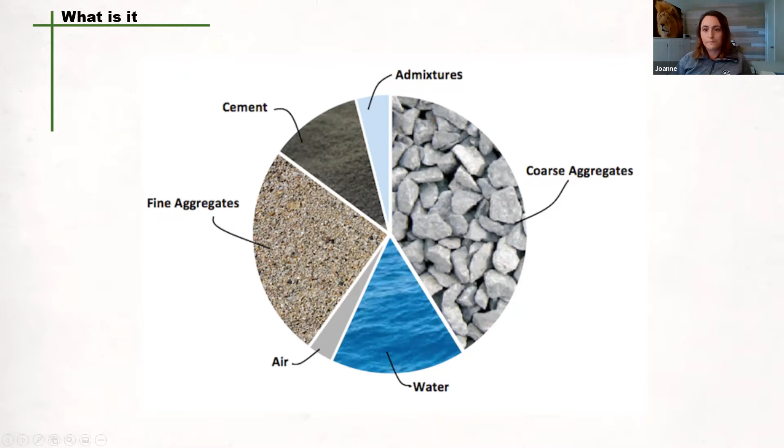I want to talk a little bit more about the cement that is part of concrete. There are quite a few components to it, but I'm just going to deal mostly with lime, which can take up to 62 to 67%, depending on what you get, as well as silica, which is 17 to 25% of the components for cement powder.

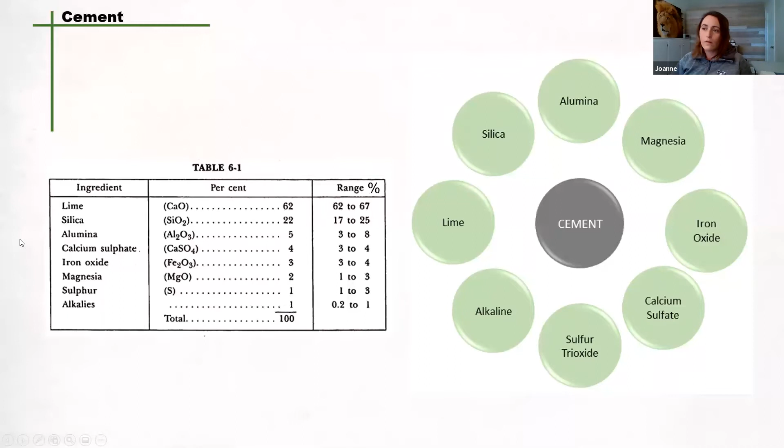When it comes to lime, there are quite a few hazards associated with this, and you do want to consult with your SDS sheet as well when you're looking at the different components of your concrete.

So worker safety for lime — particularly quicklime — is important since it's an alkaline material and reactive in the presence of moisture. Workers handling lime must be trained and wear proper protective equipment. There are quite a few eye hazards that can cause severe eye irritation or burning, and this could include permanent eye damage. Eye protection, including chemical goggles, safety glasses, or face shields, should be worn if there's a risk of lime exposure. Contact lenses are not suggested to be worn in its presence.

Skin hazards are another concern. Lime can cause irritation or burns to unprotected skin, especially in the presence of moisture. Prolonged contact with unprotected skin should be avoided. Protective gloves and clothing should cover arms and legs as well. Remember, lime does react with moisture and generates heat, capable of causing thermal burns.

There are also inhalation hazards as well. Lime dust, when dry, is irritating if inhaled. In most cases, dust masks should provide adequate protection. In high exposure situations, you may want to look at increasing your respiratory protection. Again, consult your SDS sheet.

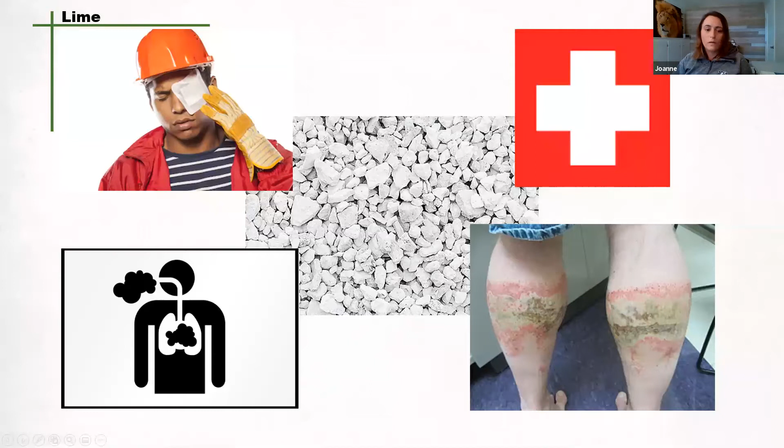So the next one here is silica. Silica dust can cause silicosis, a serious and irreversible lung disease. It could also cause lung cancer. Cutting, breaking, crushing, drilling, grinding, or blasting concrete or stone releases the dust. As workers breathe in the dust, the silica settles into their lungs.

For information on protecting your workers from harmful exposures to silica dust, you should also see the SDS sheet. It is the most common hazard on work sites. Any activity that creates dust can expose workers to airborne silica. The most common ways to create silica dust are chipping, sawing, grinding, hammering, drilling, crushing, loading, hauling, dumping, building demolition, power cutting, and dressing stones.

You also have renovations, hydroblasting, dry sweeping, quite a few, excavating as well. So it's not just with concrete work that we have silica risks.

Symptoms are shortness of breath, loss of appetite, cyanosis, severe cough, chest pains, fatigue, and fever.

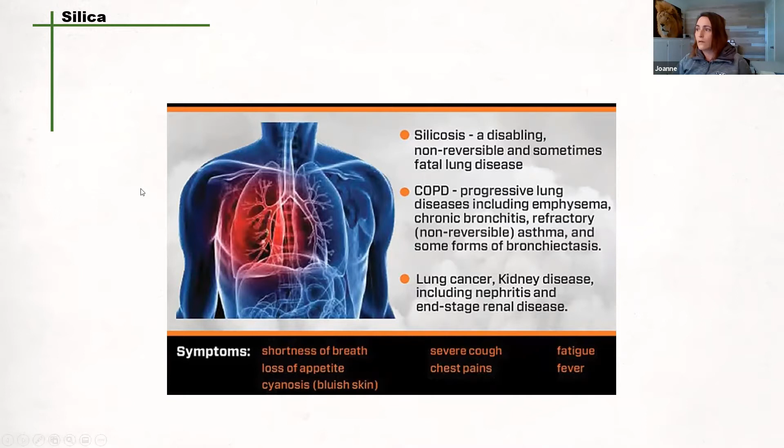So now I just want to go quickly through the hierarchy of controls. We talked about a couple hazards, we'll get into them a little bit more. But when we're talking about ways to control those hazards, we always want to use elimination as being the most effective if possible, and then go to substitution. Then we look at engineering controls, which isolate people from the hazards. Administrative controls, this is the way people work. And last, PPE is going to be your last line of defense, and that's your personal protective equipment.

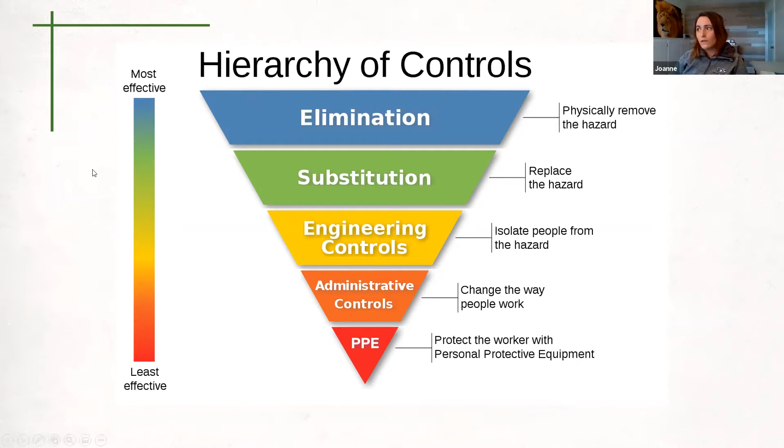So next thing I want to talk about quickly here is your concrete admixtures. I do believe here I'm going to talk about 7 quickly. There are a few more. With the new technology all the time, we're always finding better ways to improve our products.

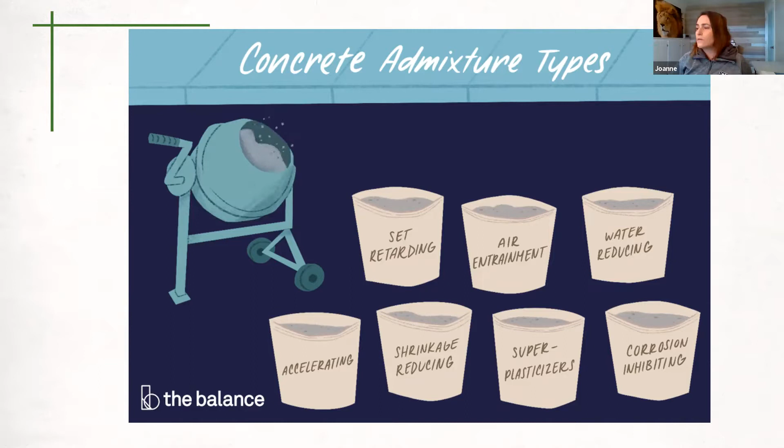So the first one here is retarding admixtures. This slows the setting rate of concrete and is used to counteract the acceleration effects of hot weather on concrete setting. So you would include a retarder to keep concrete workable during its placement. Some of the additional hazards again are going to be very similar to concrete itself, with having that airborne dust, eye irritation, and skin irritation.

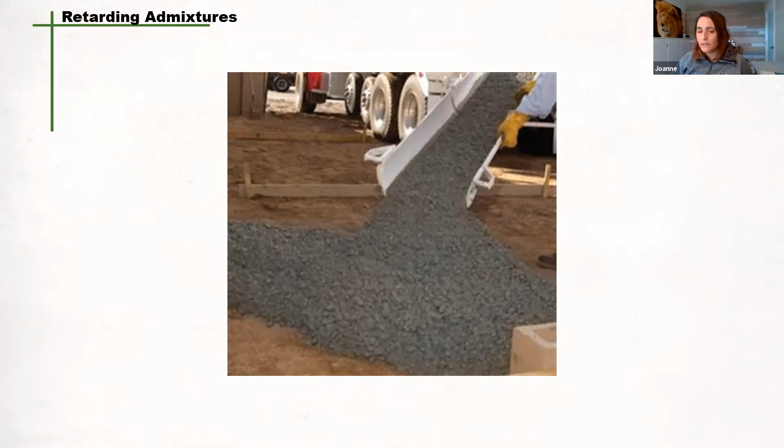Entrained admixtures. Some of the safety data sheets that I was looking at for these, you have eye damage and irritation, as well as serious eye damage, and skin sensitization are very high when it comes to these admixtures.

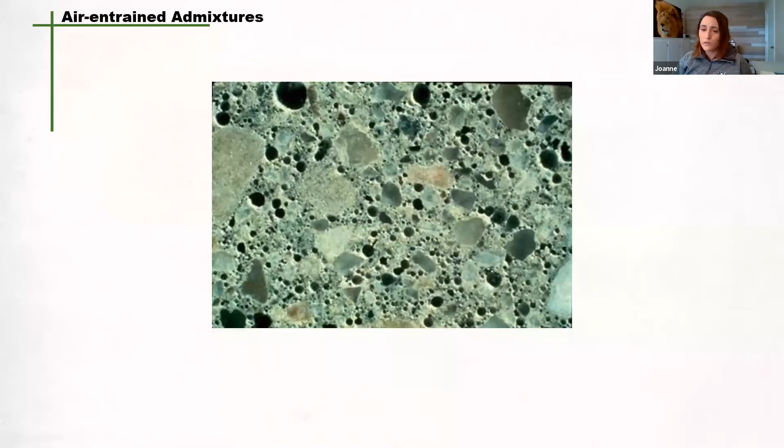Air-entrained admixtures again do have eye damage and irritation, and serious eye damage and irritation. Could also cause allergic reactions and may damage organs such as the respiratory system.

Water reducing admixtures usually reduce the required amount of water content for concrete mixtures about 5 to 10%. And this will result in a higher strength.

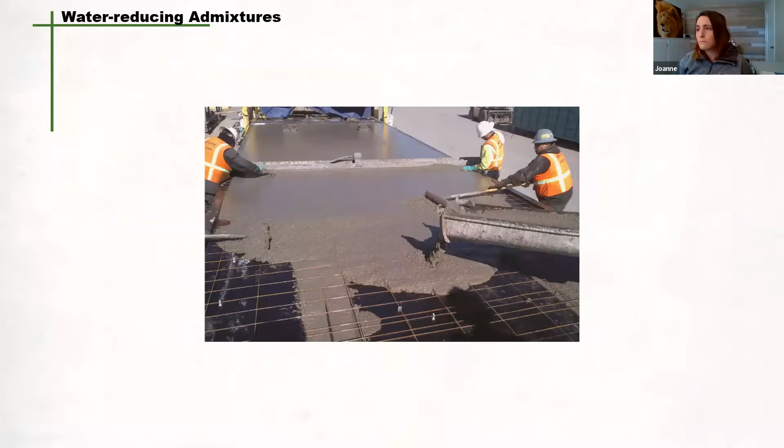Accelerating admixtures increase the rate of early strength development, reducing the time required for proper curing. This is also usually used in cold weather. Some of the hazards associated with these admixtures again are going to be eye damage and irritation.

Next one is shrinkage reducing admixtures. They're added to concrete during the initial mixing. It's a type of admixture that could reduce early and long-term drying shrinkage. This one does have skin corrosion and irritability, skin and eye damage as well.

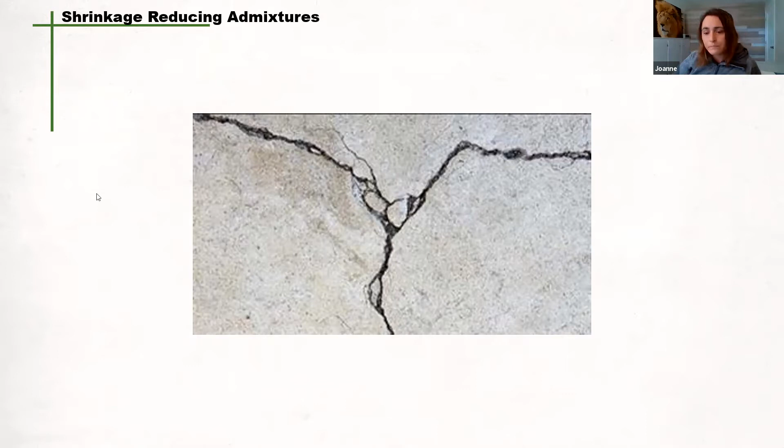Superplasticizers in your admixtures, or high range water reducers, can reduce water content by 12 to 30% and can be added to concrete with a low to normal slump. They also come with added hazards of skin corrosion and irritation, as well as eye.

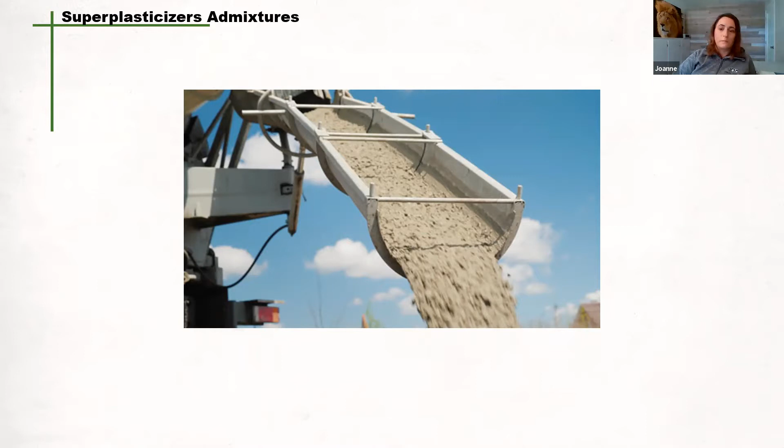So a lot of these do have the same additional hazards. We also have corrosion-inhibiting admixtures. This one also has your eye and skin irritation as well as carcinogenicity.

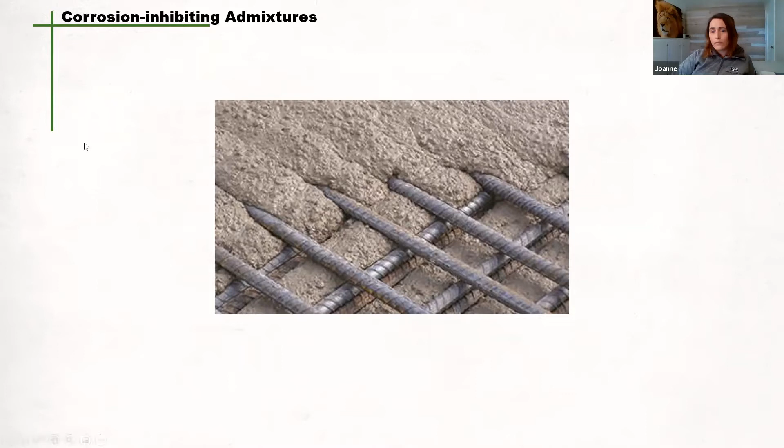So I'm going to go over a few of some of the hazards associated with concrete. Potential hazards to concrete manufacturing workers include eyes, skin, respiratory tract irritation, exposure to cement dust, inadequate safety guards on equipment, inadequate lockout tagout systems on machinery, overexertion and awkward postures, slips, trips and falls, and chemical burns from wet concrete.

So that's just summing up a little bit of some of the hazards. Exposure to cement dust can irritate eyes, nose, throat, and upper respiratory system. Skin contact may result in moderate irritation and cracking of skin to severe skin damage from chemical burns. Silica exposure can lead to lung injuries, including silicosis and lung cancer.

Some of the solutions for these are to rinse, if you're in contact, rinse your eyes with water if they come in contact with cement dust, and consult a physician. Use soap and water to wash off dust to avoid skin damage. You want to wear a respirator to minimize inhalation of cement dust, and avoid eating and drinking on dust surfaces. You want to make sure your lunch area is clear.

When it comes to wet concrete, it can result in skin irritation or even first, second, or third degree chemical burns. Compounds such as chromium may also be harmful. You do want to wear alkali resistant gloves, coveralls with long sleeves and full length pants, waterproof boots, and eye protection.

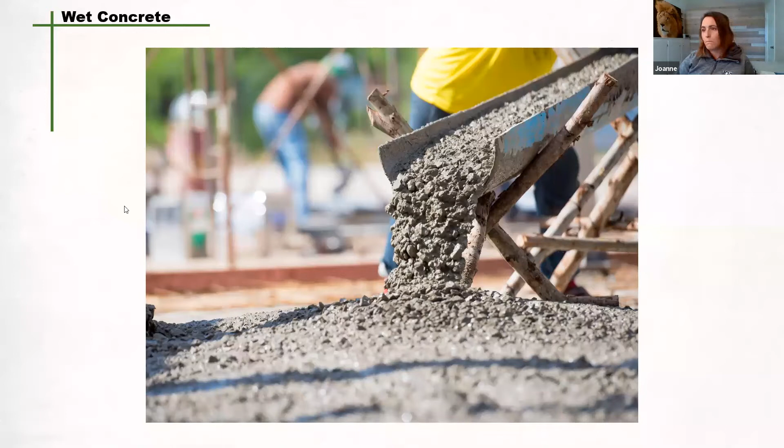I want to talk a little bit about machinery on site. There's going to be a lot of different machinery depending on the concrete job you're doing. They range from big to small. You want to make sure you have spotters, you're keeping your work area clean with a clear line of travel, and make sure everybody is trained when dealing with this machinery, and don't work underneath machinery either. And don't forget about power tools that we often use.

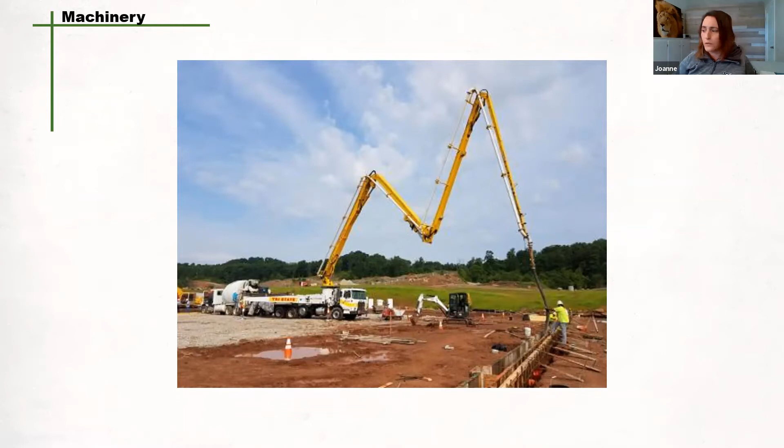Falling objects and slip, trips, and falls are also a real hazard when it comes to working with concrete. There's a lot of uneven ground that we're dealing with all the time, and depending on the situation, you may have people working above you as well. So you got to be aware of falling objects. Proper PPE, planning your route, and having a clear path would be very important.

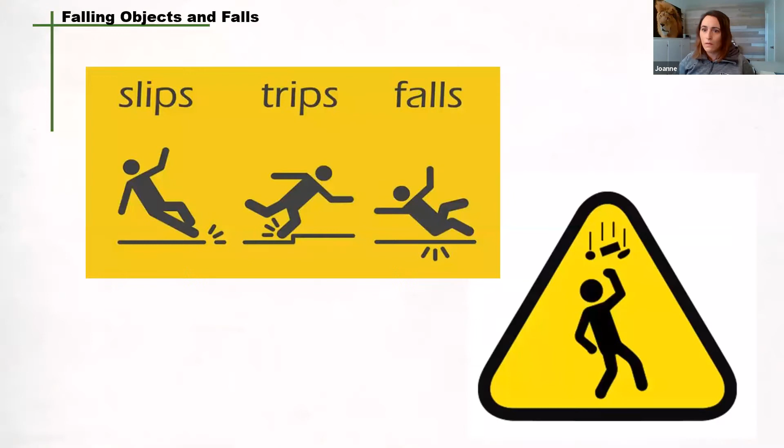Ergonomics. Working with concrete is very physically demanding, and you can find yourself in awkward body positions for extended amounts of time. Improper lifting, awkward postures, and repetitive motions can lead to sprains, strains, and other musculoskeletal disorders. Try to use hand trucks, forklifts when possible, lift properly, get a co-worker to help, avoid twisting while you're carrying, shifting your feet, taking small steps in the direction you want to turn. Again, try to keep floors clear and avoid tripping and slipping hazards.

So again, proper training and procedures and practices in place are really key.

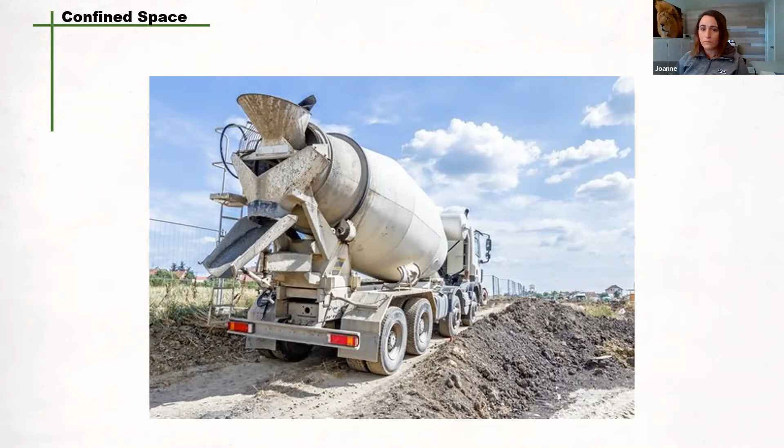When it comes to PPE, it is required on construction sites. You do need to wear your hard hat. Again, there are falling objects, so eye protection. We talked a lot about the hazards and how many eye hazards there are in the components of concrete, so you want to wear that. You want to wear the appropriate gloves for the job, depending on what stage you are, whether you're forming or placing concrete. Long pants, and sometimes people wear a total coverall system as well. And you want to wear the appropriate safety boots. If you're working in wet concrete, you are going to need protection against corrosion.

And a high-vis vest is always good too. This one doesn't have it, but...

There are often many trucks on site when it comes to concrete, unless it's a smaller job. I can't stress the importance of having spotters. The concrete truck drivers are usually very skilled, and they've done this many times. However, they may not know the environment, or there may be uneven ground or soft spots that need to be assessed beforehand. So really assess all your hazards before having the concrete truck come in, and have proper procedures and practices for spotters as well.

Justin, you had something to add to this, I believe.

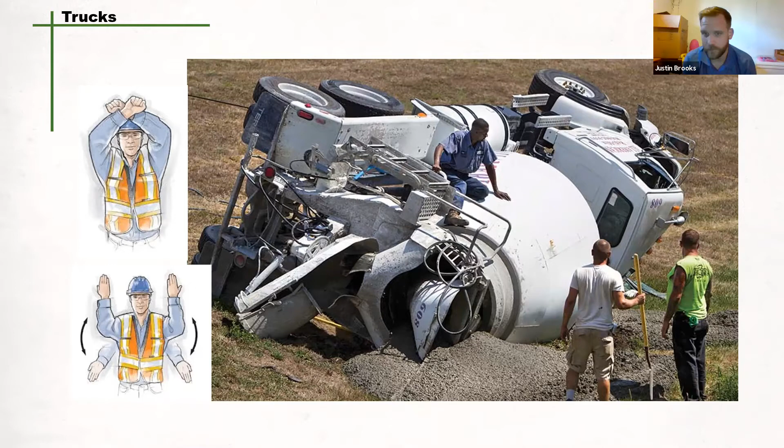Yeah, I've poured thousands of meters of concrete, and I've worked in construction a long time. And like you said, the concrete drivers are very, very skilled. But drivers even slip on wet mud after a rain, or in the spring, or whatever, and they end up hitting the braces and tearing the forms apart, or even worse for their own trucks, hitting pins. So having those spotters—I've seen trucks hit pins and it blows the tire. Steel pins that help hold the braces and forms on, and it blows everything apart.

And it doesn't even stop with the concrete trucks. You had mentioned powered mobile equipment. I've done a lot of pours where the ground is not conducive to getting a truck in, and it's too far essentially to pump. So for smaller pours, we've just filled up the bucket of a Bobcat, which has an attachment with a spout on it that you can fill up with concrete, drive it out to where you're pouring, and then just dump it in. Having everybody wear their reflective vests is absolutely imperative, because you don't know what the environment's going to be until the day of the pour.

Anybody that's poured concrete knows it's pretty rare that a concrete pour goes really smooth, no matter what. Trucks are late or early, or it starts to rain, or it's too hot, too windy, or the slump's not right. All these things can happen. So the more you prepare, having everything ready, clean, backing up those drivers, and making sure the site's clean and ready for them, it just takes one thing off that list of things that can possibly go wrong during a pour.

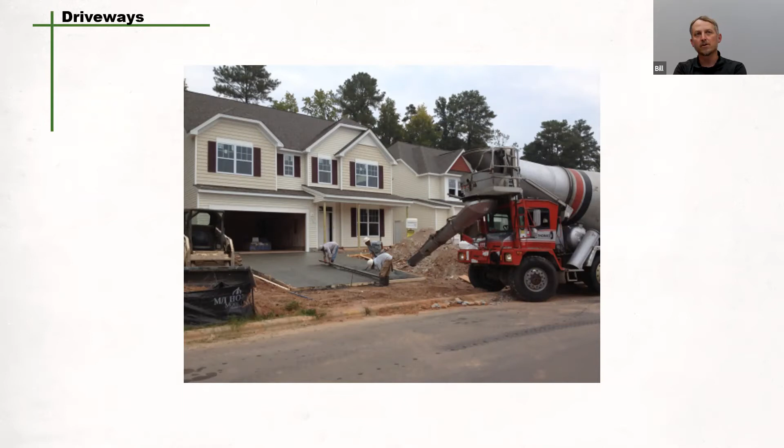As Justin said, whether it's a truck driving over them and losing a tire, or whether it's the potential—you see a lot of uneven ground here, there's a lot of activity, people are moving around—the chance that that person could trip on some uneven ground and land on that vertical steel pin, there's a major impalement hazard there that needs to be looked at.

I have a nice large scar on the side of my chest where I was pouring and ended up tripping off the slab and fell onto some wooden stakes we were using at the time, and just grazed one, but it gouged me pretty good across the rib cage. So having steel pins unprotected in formwork, as Justin said, in turnbuckles and bracing, right near your path of travel where you're walking, where vehicles are, where people are going to be moving, is something that needs to be looked at a little bit closer.

It's not just rebar that has the potential and risk of impalement. It is other items and pieces of equipment that are on that job site as well.

Yeah Bill, I just stopped sharing the screen so we can see you a little bigger. Can you share that rebar protection item that you have there? I absolutely can. Yeah, so I have a couple of different ones here as we talk about in the fall protection class, and I'll try to see if I can get the zoom going on those completely.

So here we just have your normal scratch cap, plastic cap, not intended for impalement protection. You see them lots on a job site being used on vertical rebar. However, it's not the appropriate cap for the job. The reason why you see lots of them is because they're cost effective compared to proper impalement protection caps, which are not only larger in size, but also contain armor plating on the inside.

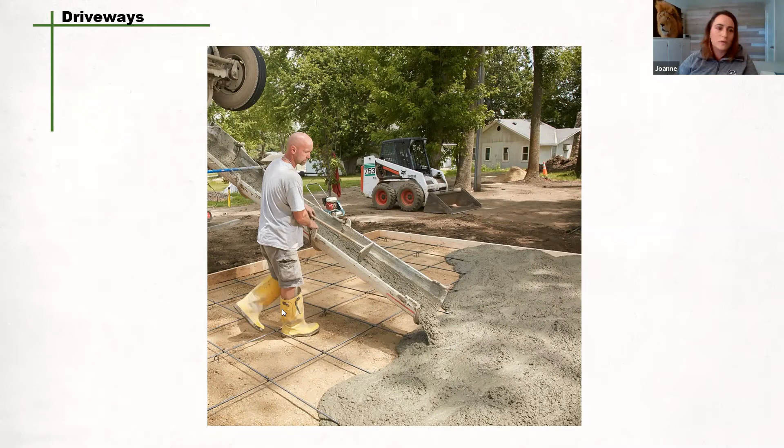And this next one here, we're still doing a little bit of residential. And here we just talked about PPE a little bit. PPE would definitely be helpful. We're missing a few pieces. And not to mention that wearing shorts, right? We don't want those concrete burns. Obviously, it's not very deep, but you can get it splashed into your boot and be stuck against your skin. You want some protection there. You also have the bobcat sitting in the back. You have pieces of equipment. So I'm not sure when they're going to be moving that later, but you want to make sure having some high vis too. So yeah, some more residential concerns on this one.

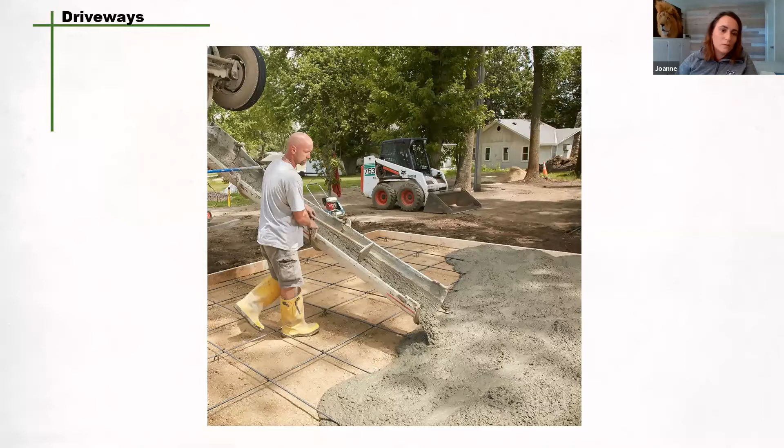Yeah, a good steel-toed rubber boot is probably the right course of action for your feet. The idea of wearing safety glasses while doing concrete - I don't know if you guys ever got any concrete to the eyeball, but if it burns your skin, I can only imagine what it does to your eyeball.

I think the biggest, actually a good— sorry, go ahead Bill. No, I was just going to say, I think one of the big things that I can see with this one right off the bat is, it's great that he's using the proper PPE, using some steel-toed rubber boots, but they look like the fit is completely wrong for him. Anytime that we were ever pouring, having a properly fitted pair of rubber boots, ones that your feet don't swim in, because you're dealing with trip hazards left, right, and center, the rebar that's suspended.

All that kind of stuff. And it's difficult to maintain proper footing, to prevent a rolled ankle, to feel where the rebar is and make sure that you're not going to trip over backwards. He's focusing forward, and he's likely moving the chute side to side, possibly stepping backwards as the truck is moving backwards to completely fill that area. And a loose, poorly fitted pair of rubber boots, steel-toed or otherwise, for this situation will potentially lead to— you just don't have the same dexterity, you don't have the same feel wearing an incorrect pair of footwear, and it will lead to trips, slips, and falls, rolled ankles, and otherwise. So that's right off the bat, I see that, and I would question his selection of protective footwear. Better than a pair of running shoes or flip-flops, of course, but having those properly fitted rubber boots is very important in my mind. Yeah, very true.

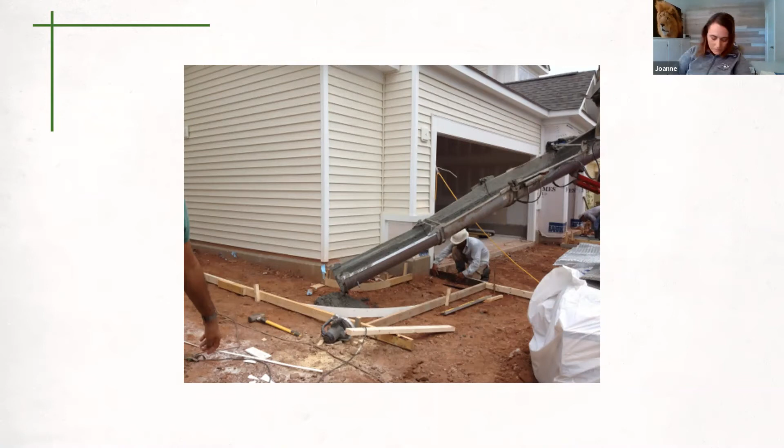Yeah, that's a big one. It's a good picture for that, Joanne. One of the worst things that I've ever found when doing concrete is— and sometimes you can't avoid it because the area you're working in is just tiny, and you don't have much of an area to place all your rebar that you didn't use, or wood piles, or whatever. But get everything away. It looks like these guys actually are forming as they're going, the concrete truck just showed up, and I don't know if they're planning on throwing in their rebar as they're going. Some guys do that. I've seen some people lay down a matting of concrete and then just throw their rebar, lay down 2 inches of concrete, then throw the rebar on top and pour over top of it because it's fast and it's not tied. And it's definitely not recommended to do it that way, but some people do. So it looks like these guys are just doing the job as they're going because the concrete truck's there, the form's not finished formed off, and there's no rebar in there. So, but having all that— the sledgehammers and the Skilsaws away from there, you get stuff full of concrete, and you just end up doing more work after washing everything.

You already have enough tools to wash. And the other thing is, we talk a lot about with safety.

Protecting not only workers, but protecting the other investments on site, like the home itself. So making sure that you've polyed off all the siding.

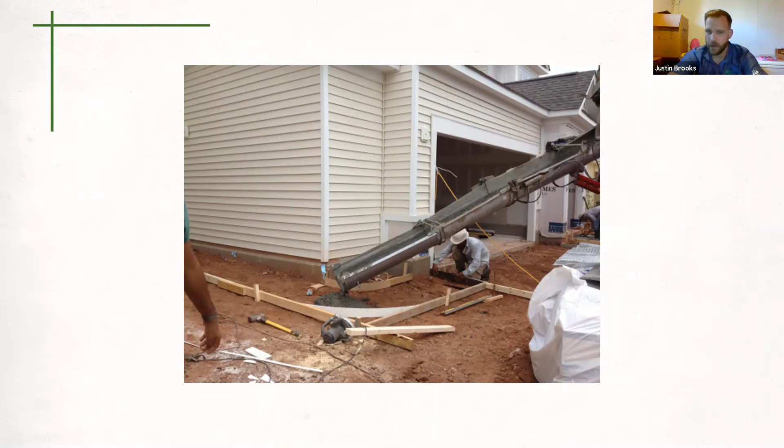This brings up the point of even just having safety glasses on while pouring concrete. Concrete splashes, and anybody with experience pouring walls and using a concrete vibrator knows when you pull that thing out and it's still going, it splashes concrete everywhere. Just the idea of concrete coming out of the chute into the form, it splashes, it can get in your eyes, it can get all over tools and everything. It really makes a big mess.

We've seen the videos, I don't know if the Three Stooges made famous the whole stepping on a rake business, but that's the real deal. You step on the backside of a rake when it's just sitting there, and that thing comes up and smacks you. So the placement of tools along the way too, not just in storage or while we're waiting, but every time you set something down, a rake or a pry bar, we've got to be conscious of what we're doing and how we're setting it, because we could be setting up booby traps. There's a lot going on when we're pouring.

Yeah, not myself, Mike, but I do know personally a friend who stepped on a rake while they were at work and it flipped up and just about broke their nose, gave them a black eye, a whole bunch of stuff because they were rushing. There was stuff going on, tools were just thrown and strewn about, and somebody inadvertently stepped on a rake, a friend of mine, and it gave him quite a surprise when it snapped up and smacked him in the face. So these aren't hypotheticals, this is the real deal, hey?

This picture here looks like we're doing some kind of garage pad, and then we have a sloped section to it. Again, PPE does look fairly good from what we can see, gloves and everything, and ergonomics is key. We do have a bystander, you can see, not wearing PPE beside on the end of the photo. It's important that they be made aware of the hazards as well.

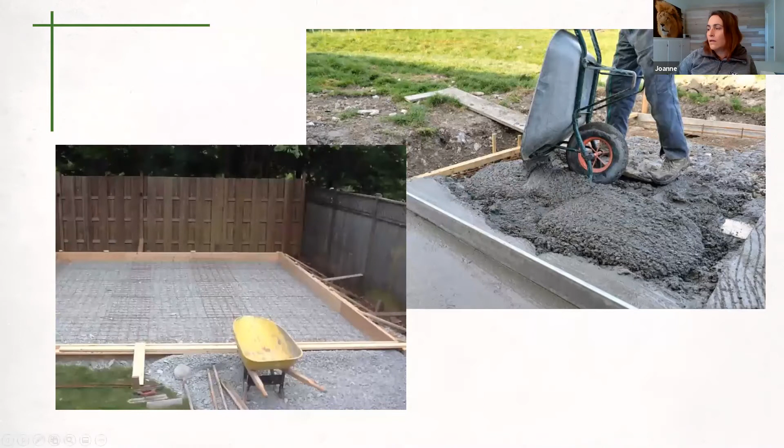Okay, I'm going to move on to the next one here. Mike, you had already talked about this a little bit. Wheelbarrows, and we do use them quite a bit. We do see the running shoes or the other shoes there as well. This brings up a couple of points, especially when it comes to wheelbarrows.

Every single time, anybody that's worked in construction on pours, who gets the wheelbarrow? The new guy, always, because the reality is, in order to do concrete, you need a lot of experience. Even as an experienced person, I've lost some pours before that just didn't go my way, or forms blew open or whatever. So you have your most experienced people, you climb the proverbial ladder. You start on the wheelbarrow, or you're raking, and then from raking you maybe get on the screed, and then you start doing things like the preliminary edging, just pushing rocks down, not the final finish, but the first form to get a feel for it. As you work up, you start getting into things like your power screeds and power trowels, depending on the size of the pours. But that first job is always that wheelbarrow.

So it looks like they've done some actual groundwork on that bottom left one, where you can see the difference between the two, how they're entering the forms. The first one, they've used the rock that they've used as their base to build a little ramp that goes up onto the side of their form, and then they drop in, of course.

You know, the wheelbarrow is going to have some bounce to it, which isn't the safest thing. They may be putting a 2x8 or plywood in there to ramp down, and then drive over top of their wire mesh. But in a lot of areas, in my commercial experience, you might be doing a little bit of wheelbarrowing. You might have a double or triple mat, and then you're using planks and stuff like that to navigate your way across this pour.

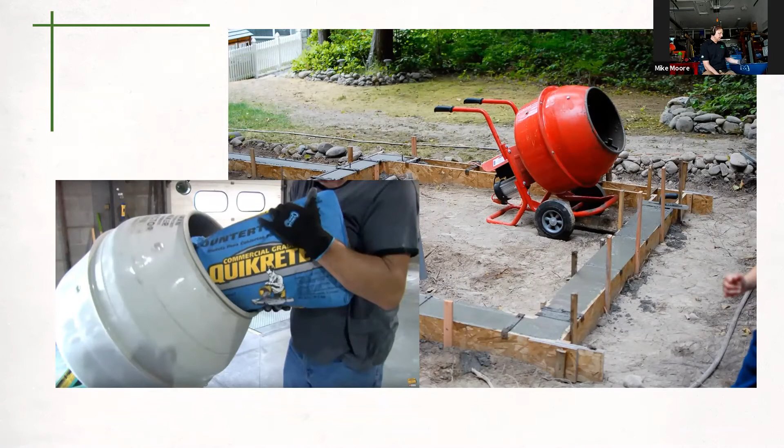And I'm trying to mix with a shovel in a wheelbarrow, where the time and money I saved, I made up in time and effort. What I should have done, and what I would do next time, is calculate how much concrete I actually need for my project. There's lots of concrete calculators out there - you can use them right off Google - and then see what it costs to get concrete delivered. Because here's a picture of a concrete mixer, and that's what I did. I ended up buying a concrete mixer because I found out that for a couple hundred dollars I can get my own concrete mixer, and the pre-mixed bags are a lot better. But this whole idea of mixing a wheelbarrow with a shovel - worst day of my life. Just want to share that.

Worst day, my whole life.

There's a lot of companies that supply concrete with a minimum amount you have to order. But I've done jobs with friends where there's companies that do small batch - if you only need 1 or 2 meters, it's not super cheap, but they'll do it. You can rent these mixers and have the rental store explain exactly how to use them, because there's a lot of dangers with these types of mixers.

People get crazy - they do 1 bag and think it didn't pour a lot, so they do 2 bags. Then they start overloading the mixer, and they're trying to use the shovel while it's running, and the shovel gets trapped. There's a lot that can go wrong even with a small piece of equipment like a mixer. It sure beats mixing in a wheelbarrow, but you still got to know there's dangers that come with these concrete mixers.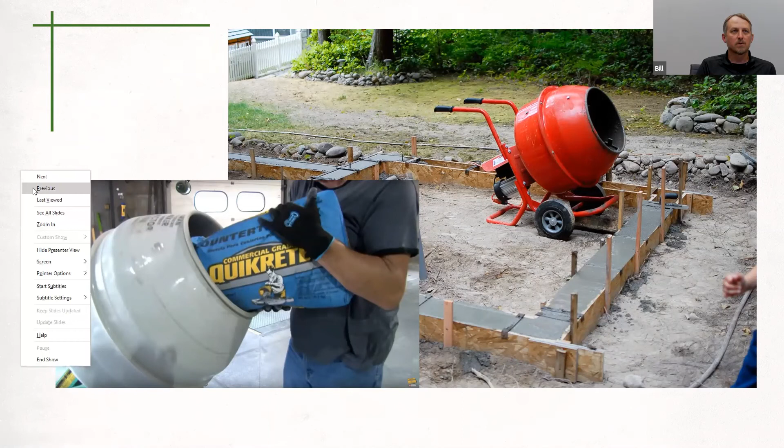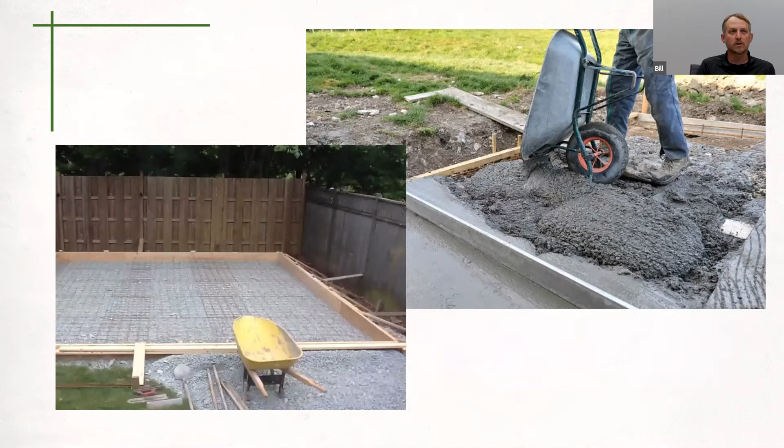On the commercial side, the newest person gets the job of the wheelbarrow. But on our residential side, when we were doing residential flat work, there were 4 of us. So for a slab of that size, you have 2 wheelbarrows and everybody's running and working together. I wanted to talk about not only the strain, but the physical exhaustion that comes with it. Concrete's on the ground, people are running around, there's things that need to be done.

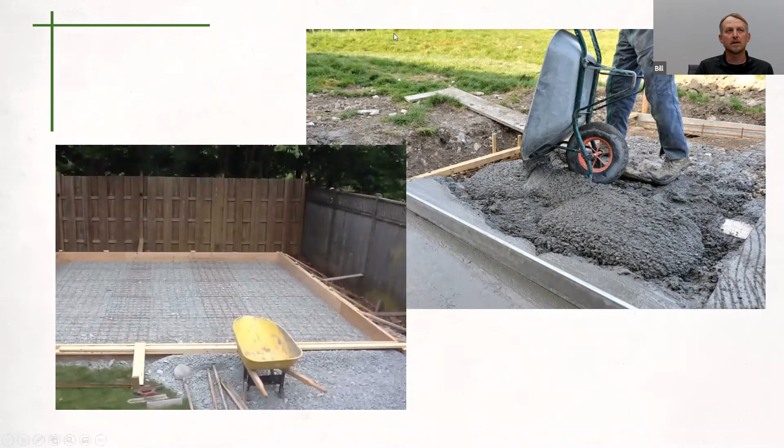You're moving - more often than not I've double-barreled. You bring an empty barrel to the truck, they fill it, you take the full one, dump it, come back, drop off the empty one, pick up the full one, dump it, and you're running. Because you want it on the ground as quickly as possible. The temperature's getting up, you need to get this stuff placed and sitting on the ground, and you have no time to waste.

Not bragging about pushing toward exhaustion, but there have been points in both commercial and residential work where, once you're at that last wheelbarrow, you have trouble remembering your name. It's hot, you're dizzy, you've been doing a workout that would make CrossFit look like preschool, and you're running yourself out - and all of a sudden you notice you haven't drunk any water, haven't taken a break, you're short of breath, you're dizzy, and heat exhaustion is starting to kick in.

In those situations, it's something else to remember: try to bring enough help. Having extra people, you need to plan ahead for those type of things. Yes, 2 people could put that slab down, but they're going to work themselves near to death to place it. The finishing part is fine, there's a lot of waiting in between hits, and it's all good. But that hour and a half while you're placing, it's a rush. You're moving, and on small crews, when you don't plan properly to have enough help, even somebody just raking, if you're trying to wheelbarrow and rake and then stop and screed and wheelbarrow some more because you think 2 people can take on a slab of that size, there's a lot of effort there. That physical exhaustion is a big thing to look out for in those situations.

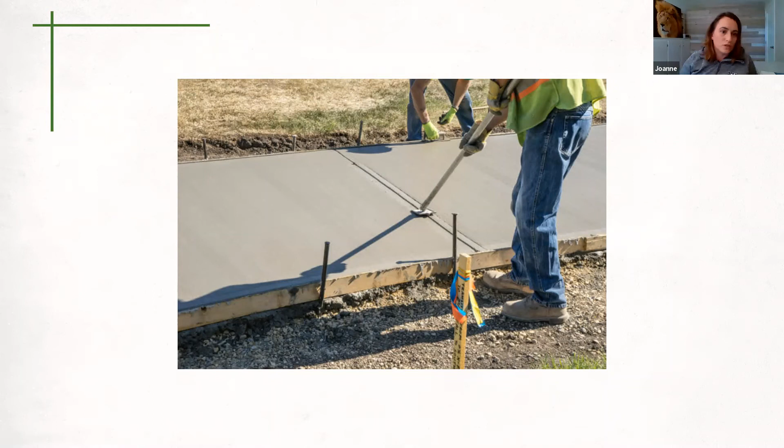The one thing I want to make note of, you can see quite clearly in this one, the concrete pin - not talking about impalement - that concrete pin just below the guy putting in the expansion joints in the center. If you look at the top of it, it is heavily mushroomed out. Steel sidewalk pins that have been smashed with a sledgehammer over and over again get mushroomed at the top, and then those mushroom tops start to break apart. The next time you have a glancing blow, a mislaid strike, or even a solid strike with a sledgehammer, those little chunks of hardened or mild steel on those pins will break off and fly out at extreme speeds.

We used to have stories passed around the lunchroom table about a worker who was putting in pins with a sledgehammer, and one of those shot off at such a velocity it went through his pants and ended up embedding itself into his leg, nicking one of the arteries in his leg from a mushroomed steel sidewalk pin.

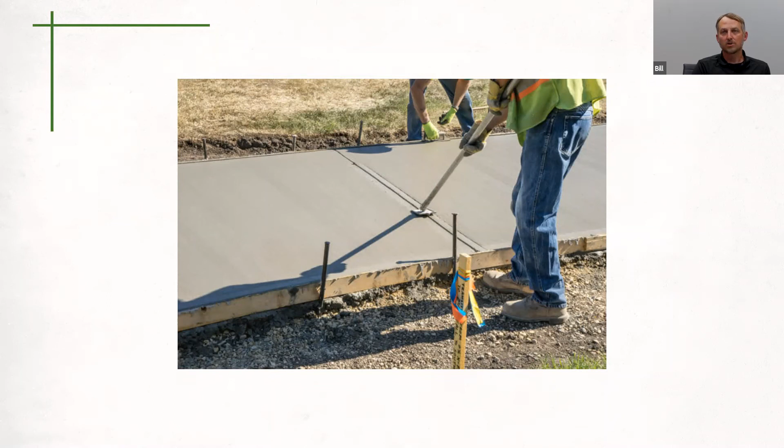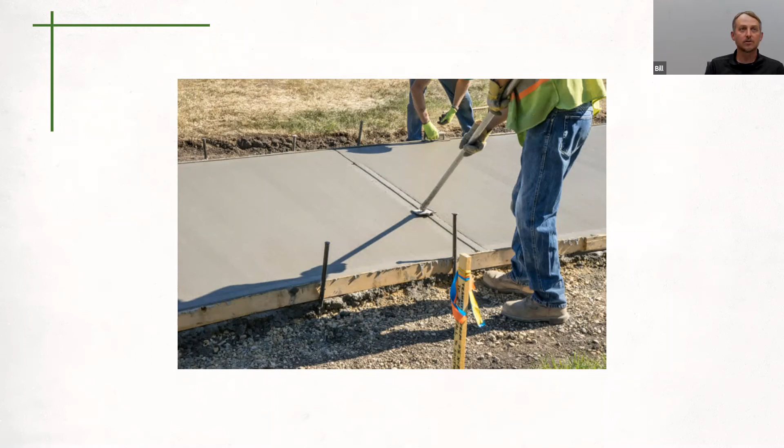On one of the last jobs I was on, we were doing a lot of concrete. One of the tasks we had the laborers do was go and cut the ends off those pins so that you got a nice flat starting point again, making sure we've eliminated that potential hazard of high velocity projectiles coming off those steel sidewalk pins.

Really good. I've worked in numerous places where that's a high topic of conversation - at least once a year they bring it out as a safety topic, to make everyone aware of that mushrooming top on chisels, on anything, because it does happen. I don't personally know anyone who's been hurt by that mushroom top shooting off, but by the emphasis of companies and by the injuries that have happened out there, even though I haven't seen them, it's real. It happens.

I just want to speak about rebar for a sec. I've got my cutoff saw here, it's got a 14-inch blade on it. This cutoff saw, like you say, you got the laborers to start cutting the ends off those pins - do you guys think there's a need for training on something like this? Just a saw? Like, what could happen?

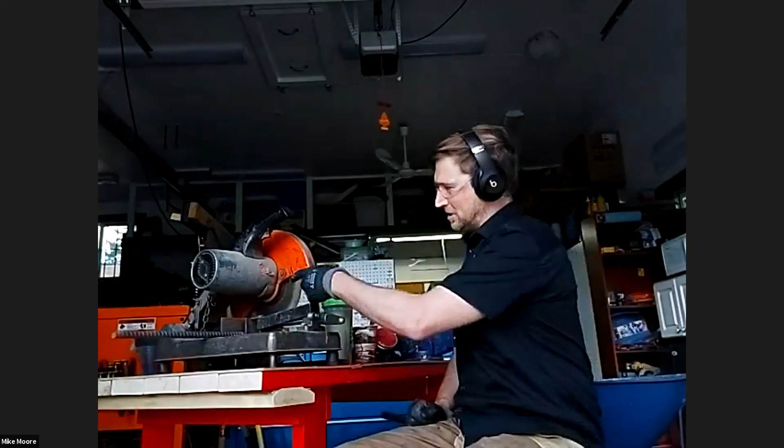With something like this, if there's a burr on every end when you cut this rebar, there's always going to be a burr on the end. And that burr is a pain because you can cut your arm with it. A lot of people use the side of the blade on here to do it, they thin that blade out. And as we all know, abrasive blades, when thinned out, when misused, or even because of a manufacturer defect, can explode. I've actually seen pictures where a piece of that blade has been embedded in a face shield. So can you imagine if I'm just using safety glasses, thinking 'oh yeah, I'm protecting the eyes' - but are you protecting the face? Are you protecting the other areas too?

If that blade blows up because of improper use, or because you try to take the burr off the side of the blade, or sharpen it by banging or hitting on it, if this blade is compromised and it does explode on you, or maybe someone dropped it while transporting it and it cracked, I do not want that going through me. So what you do is wear safety glasses in combination with a face shield on a piece of equipment like this, along with proper use and knowing the hazards related. This is a good example of standard equipment that anyone can figure out how to use, but if they're not trained in the hazards related to it, or just not aware, they can get themselves into some big danger.

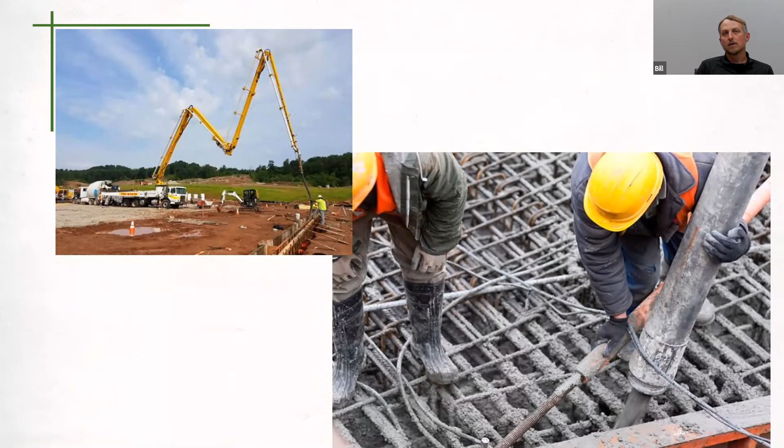One other point with those flying projectiles - we haven't seen pictures yet, maybe it's coming up, but stripping the formwork. I can tell you from firsthand experience, when you strike two hammerheads together, say you have one and you're trying to drive another one down, whether it's mushroomed out or not, it has a very real potential of taking a chunk off the side of that hammer and having two pieces of hardened steel fly out at extreme velocities.

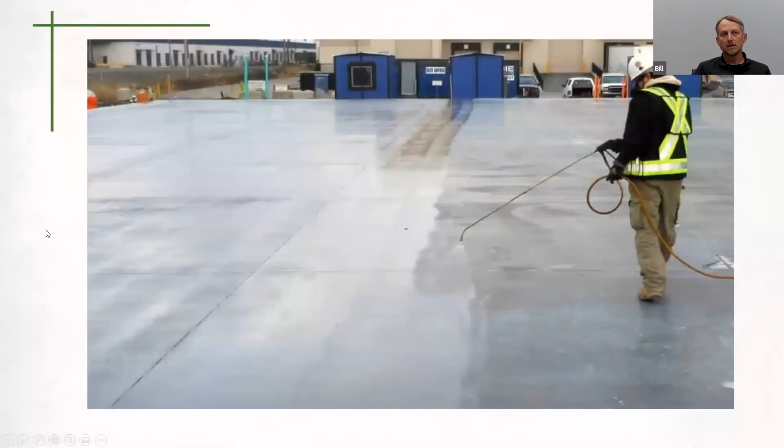I was shaping a piece of steel with a hammer, and underneath I had another hammer, trying to flatten it out, and one of the chunks flew off and clipped me in the knuckle to the point of stitches. Just from doing a couple of taps, hammer on hammer with a piece of steel in between, trying to shape a piece of metal.

Oh, here we go - Joanne's got a picture of stripping formwork. Very timely, but yes, striking two hammers together is incredibly dangerous. Taking two claw hammers and using one to beat the other down into the formwork for stripping it apart, you're asking for a chunk of hardened steel to come flying off that hammer at high velocity.

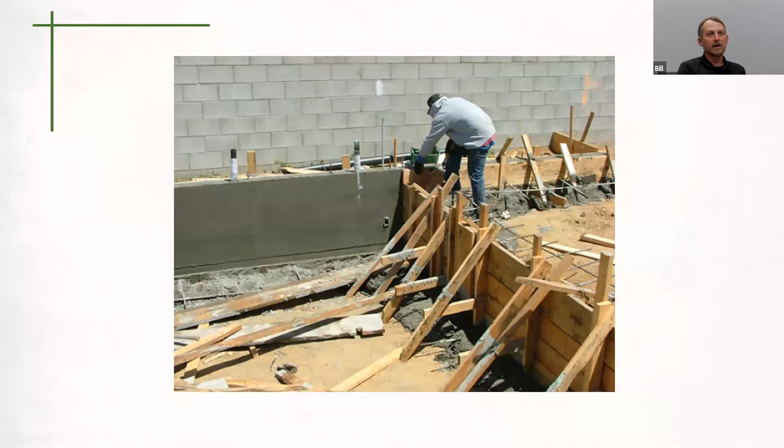That's really interesting, Bill. And even swinging a hammer - I was doing concrete, one of my first projects. I had a concrete guy, a fantastic friend of mine, showing me how to do some formwork, and he was getting me to hold pins for him. I'm holding a pin that's probably 2-3 feet long, and I have to hold this against a piece of plywood or OSB, while he is swinging a sledgehammer with all of his might. One of the scariest situations in my life - the trust you have to have in someone to hold a pin while they swing a sledgehammer at your arm. A lot of times there's better ways, and what I found is the better way is, how about you hold your own pin and get it started and nail it.

But with this piece of equipment, if we're not aware of what's going on - like you said Bill, I had no idea about hardened steel and its ability to shatter and become projectiles. But just the swinging of a hammer on pins, if we just think we're going to go along, there are a lot of hazards involved with that. So you should be aware of it.

I'm glad you brought that up, Mike. I was going to bring this up earlier, but not then - it's a perfect segue. I was working on a job where that exact thing happened. The person ended up hitting the pin, but then the sledgehammer, because the pin was on a slight angle, deflected off and smoked her finger - it actually blew up the worker's finger. What had happened previously was the classic case of workers not wanting to go back to the C-can to grab the tools they needed. One of the things I implemented when working with these pins is to just use a pipe wrench.

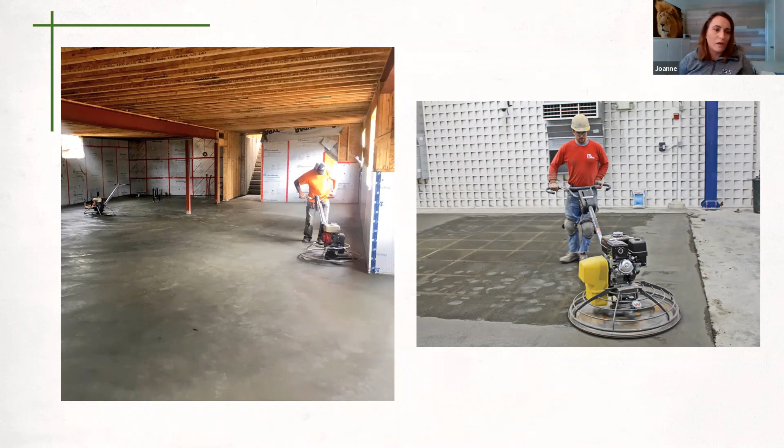We have a couple minutes left, I do believe, to the hour's almost up. So I did bring up this one last photo on your power trowel. If you have any comments on that before we wrap things up.

Just quickly, in case someone else has something to jump in on, the picture on the left, one of my concrete friends, what happened is that he was power troweling a basement. So you got an enclosed area, you got a gasoline engine running, and he said one time he was in the basement, and I don't know whether it was winter or what was going on, but he didn't have proper ventilation set up. Took a shortcut and just thought, oh yeah, I just got this bit to do, I'll just power trowel it, no big deal. Crawled out of the basement, almost didn't make it out of the basement because of his exposure to bad air.

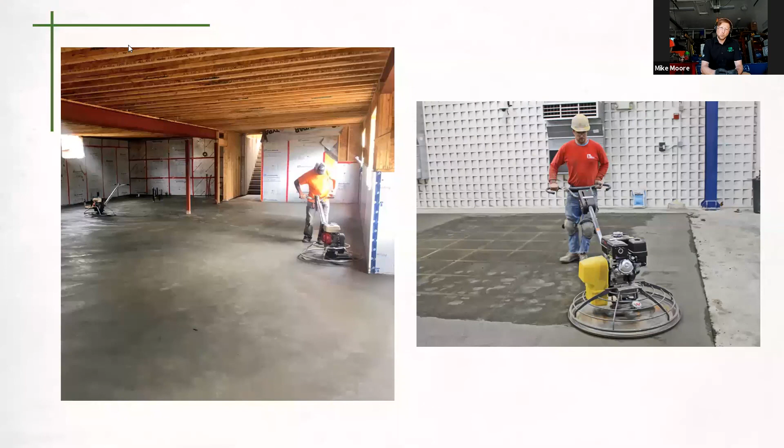Gasoline engines in enclosed spaces can really displace oxygen. I know even with the use of scrubbers on the exhaust systems, that you still have the buildup of gases. So proper ventilation in the basements is a big deal. I've spent many days sitting in a basement power troweling and then turning on fans and making sure that you have proper ventilation, and then closing everything up and letting the heat build up and then redoing that all.

You have to plan ahead for those type of things. If you just show up, as you said, everything with pre-planning, that seems to be a good message for today, is having the proper plan in place, identifying those hazards ahead of time, and doing a reasonable hazard assessment before you go on to those tasks. Making sure you have the right equipment, so you have air moving equipment, you have scrubbers on your power trowels.

A couple of the other issues with that picture that I've encountered in the past, when you first start up, if you've gone ahead and you've done your first hit with the floats and you're coming back in, sticking and stuff like that, you got to be prepared and competent to operate a power trowel. The first time I ever used one was, of course, working not in an occupation, more on a farm build kind of thing, and I thought, oh, how hard can it be?

Unless you've had a little bit of experience on them, it's quite difficult to understand the motion and how to work it properly and how to make it move and how to have it not fling you from side to side and stuff. So there is a steep learning curve with them that requires a high level of competency before you decide that you're going to go to Home Depot.